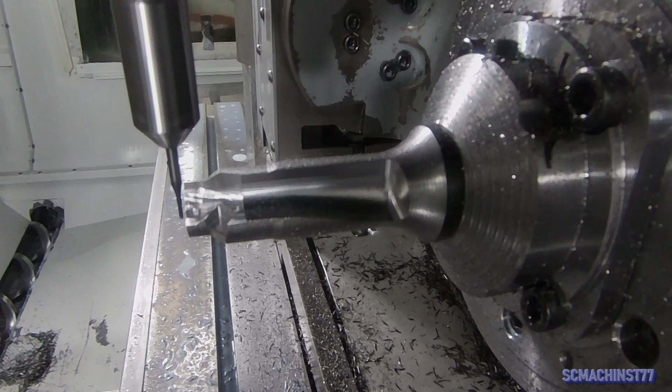What's up everybody, welcome back. We're going to start today, I'm going to show you guys how to do 4-axis toolpaths using your views. This is kind of a follow-up to the video I did before on WCS, tool planes and C-planes.

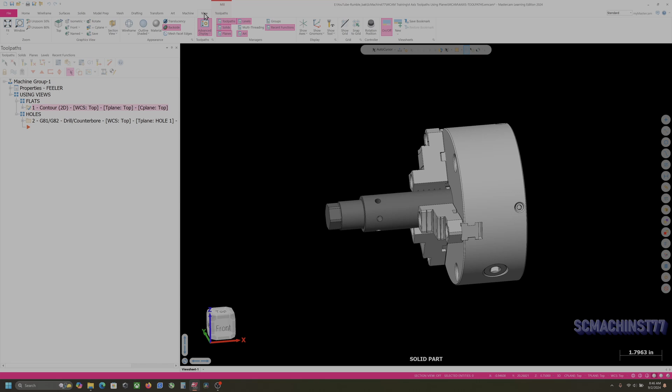What I've got here is this part with a hex on one end and a set of holes, kind of shown here how I'd fixture it in the 4th axis. If we look at our gnomon and our axes, you can see I've got 0 set on the end of the part here. I've also got, in levels, a representation of what the stock would look like.

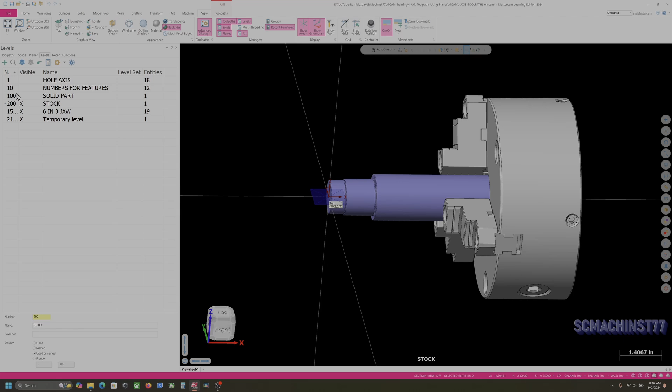Obviously you'd turn this up in the lathe before you'd fixture it in the mill, but we're going to focus on the flats and the holes in this little lesson. So what I've done is I've went ahead and created a view for each one of these flats and each one of these holes. I started a toolpath for each one, just did the first hole and the first contour on the first flat.

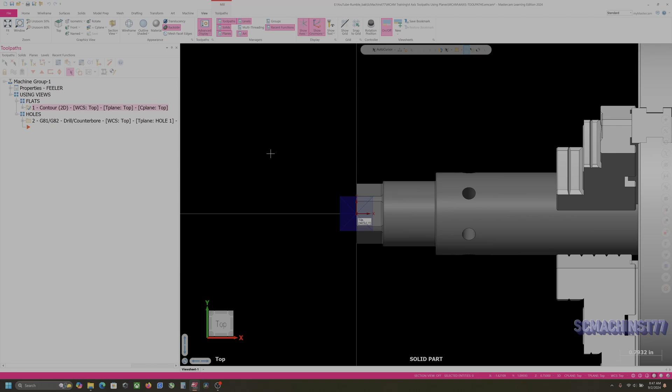Obviously if we look through and go to our planes, this first flat is in the top view. If you look at it, so it's going to be all top.

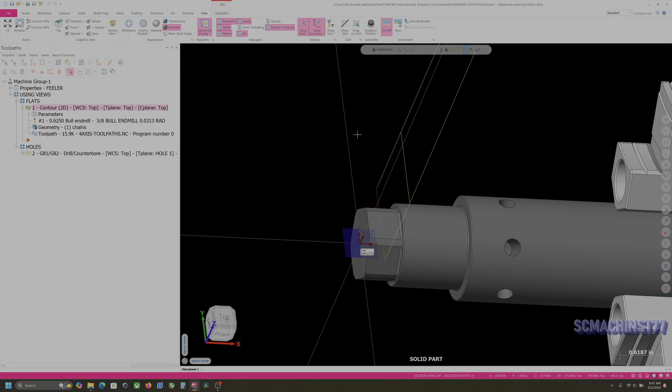Just for a little demonstration, I'm going to do another one. But before you start, like I just did there, before you start chaining, if you look down here where my cursor is, you can see we're still in all top views. Before you start, cancel out of that.

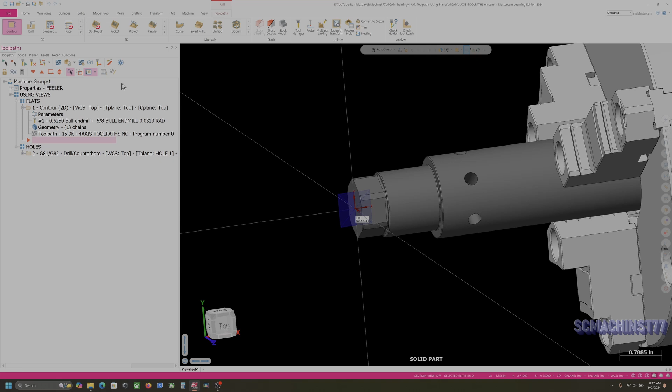What you can do is you can either go to your planes and go to flat 2, or whichever flat you choose to go to next. You can do it that way, or you can right click, go to view named, and then flat 2. That's how I've got mine set up. I think it's how it's generically set up anyway in Mastercam.

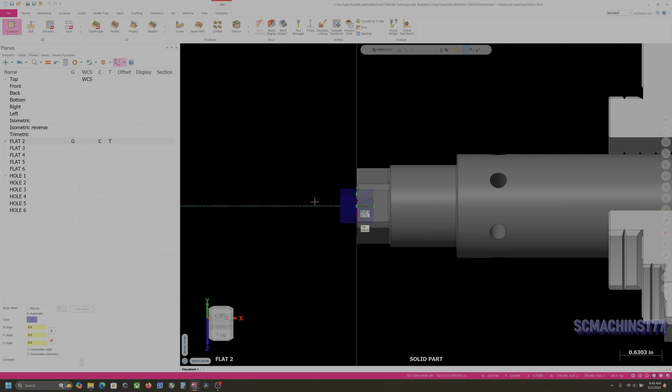So now that we're at flat 2, now you can click contour or whatever type of toolpath you're trying to do, and we want to select this edge. I know it's not all the way up against the wall there, but I'll explain why that is here in a minute. So we've got a 5/8 bull end mill.

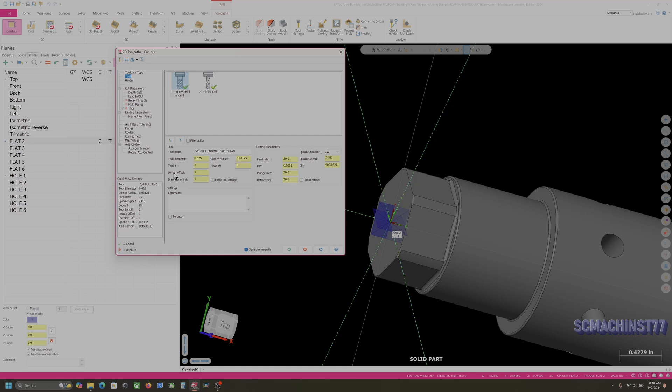16 millimeter is pretty close for everybody who uses metric. We've got a 31 thou corner radius. And my cut parameters, because if we analyze it, look over here, this is a 30 thou radius. I just put minus 30 thou on the wall compensation or the wall stop, and that makes it go all the way up against the wall there.

I'm just doing two depth cuts. None of this other stuff's important. This is not about how to machine it, it's just how to actually create the toolpath.

If we go to our planes, you can see work coordinates is in the top, tool plane flat 2, construction plane flat 2. And all this is, once you've created one type of, like I created that first contour, once you create the next one, everything should stay pretty much the same.

So if you're doing all the same feature, like all these flats are the same distance from center, like a hex would be, you should just be able to get it set up the way you want on the first one, and then as you keep creating new ones, they should all be the same.

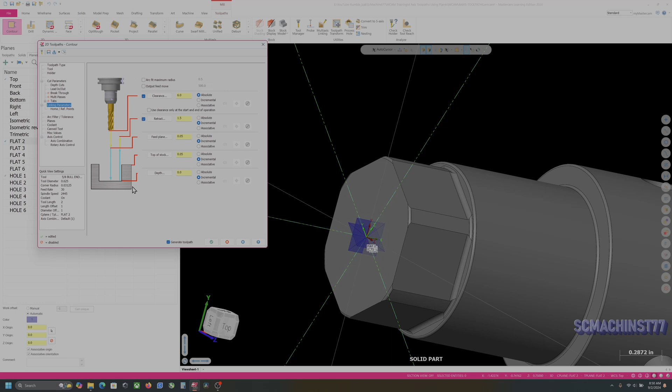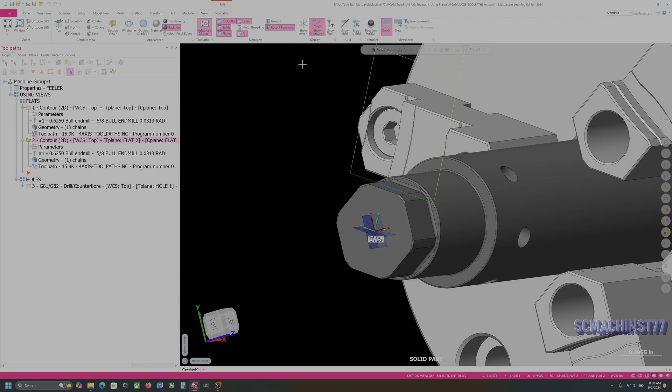So once you've created that, check to make sure your planes are correct, and just hit OK, and then you've got your next toolpath. So there's the first, there's the second. Let me turn all these axes off so it's not all over the screen.

Another way you can do this too is just copy after. Now we've got 6 flats, so we want 6 total toolpaths. Alright, the first one and the second one are good. The third one we'll have to redo.

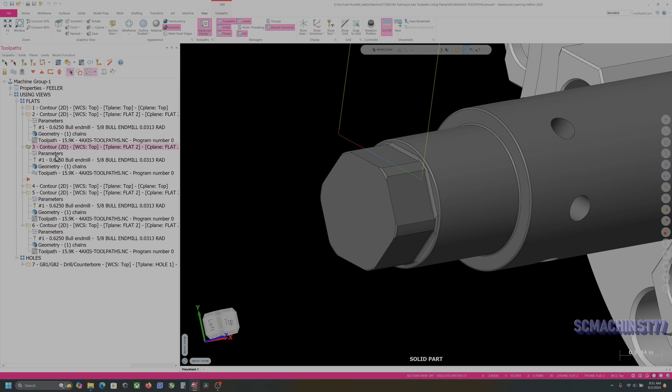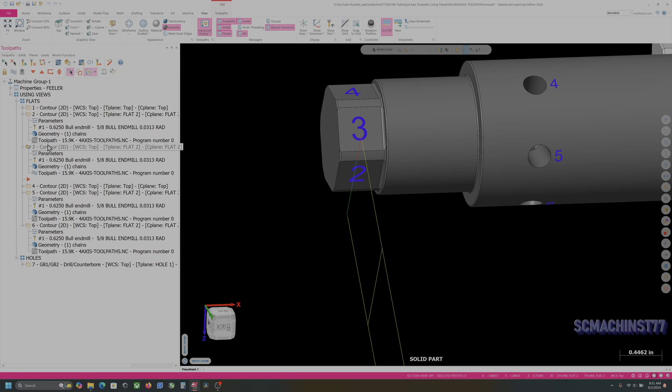The first thing we're going to do is go through and rechain all these. And if you're like me sometimes and you can get lost, what I'll do is go to levels, and I've numbered everything so I can keep up with it as I'm moving around the screen. So we're on flat 3, we know we want this flat. Go to our chains, rechain all, pick that edge, 4, rechain all, and so on.

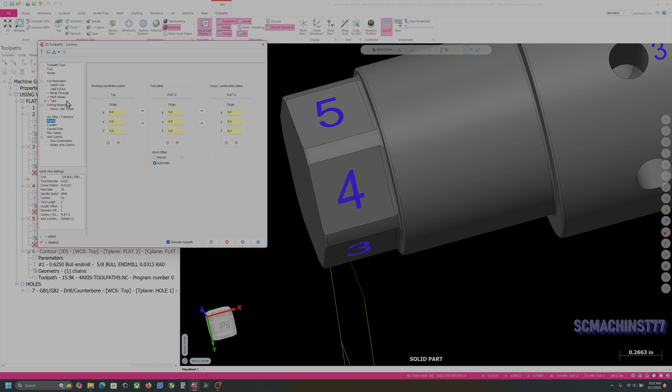Let's see. Oh, I didn't want to open it. Chain, all,

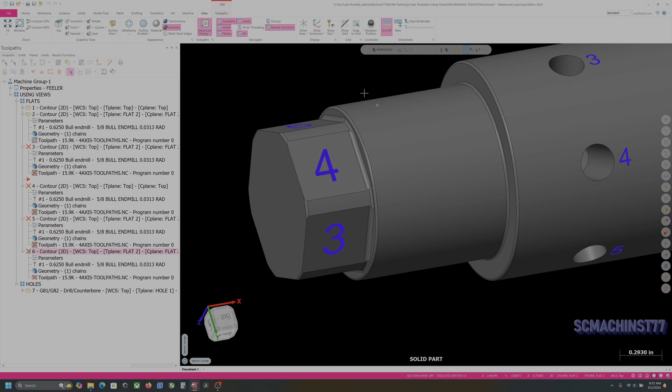Make sure you're rotating kind of like the direction that you want the part to rotate in. So the way I want it to rotate is how I've got it numbered. So depending on what machine you're on, and how you're looking at it down here, it would be rotating clockwise if you look at it from the left view.

Now if I regenerate, that is not going to be right. You got a big mess, and you don't want to try to run that because nothing good's going to happen.

So 1 and 2 are good. 3, we need to change our views. So we're just going to come in here and select flat 3. Make sure the tool plane and construction plane match.

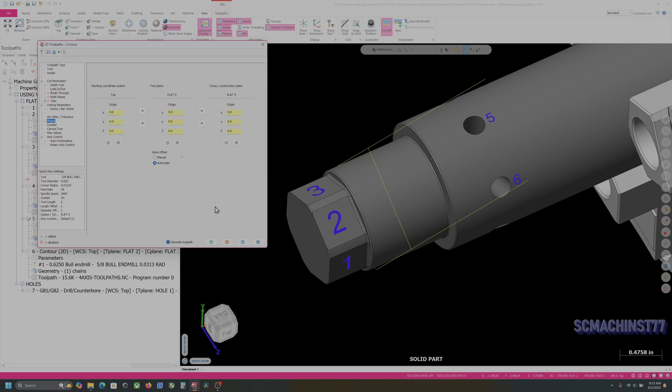Nice, right? Now we're going to go through and do the same for all these. This will be 4. This will be 5. Is that right? Yeah. And then this will be 6.

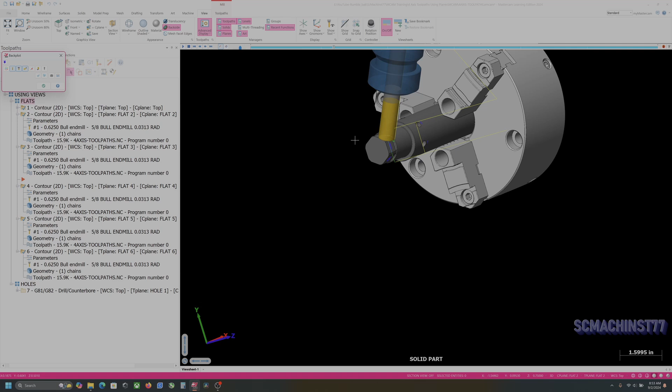Now if we select all of them, looks pretty good. Now we can back plot it and see what it looks like. All right, there you go.

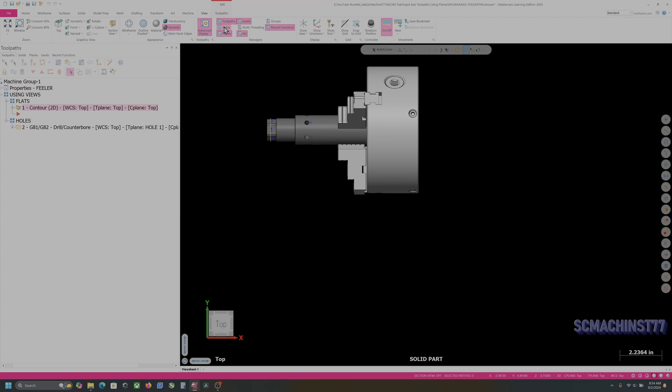Now the way you can do this, just forget about the rest of these that I've done. I'll go ahead and let me get rid of them. Go back to our top view, Toolpath. We're going to go to Transform Toolpath at the top up here in our Utilities.

I'm going to go to Rotate. For our work offset numbering, this is where things can get a little bit mixed up. Pretty sure, and I can't post this out because I can't say for definite, but you have to keep an eye on tool plane and coordinate, that'll make a big difference.

I think we just want to rotate our coordinates, I think. This is normally set up as default to be correct. I'm just going to leave this on automatic right now.

We can force it to be all the same work coordinates. Rotation plane is going to be right. We have 6 flats, but we're going to include, we're going to keep the first one, so we want to rotate 5 times. And I'm going to go 60 and 60. I'm going to hit OK.

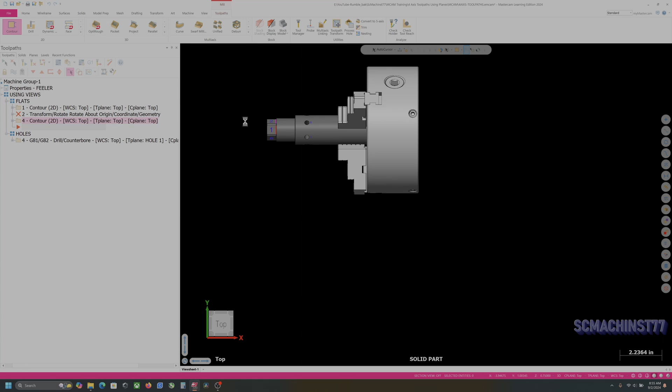And now if we backplot this, yeah, that's what I thought. We're supposed to do Toolplane. All right, that looks more correct.

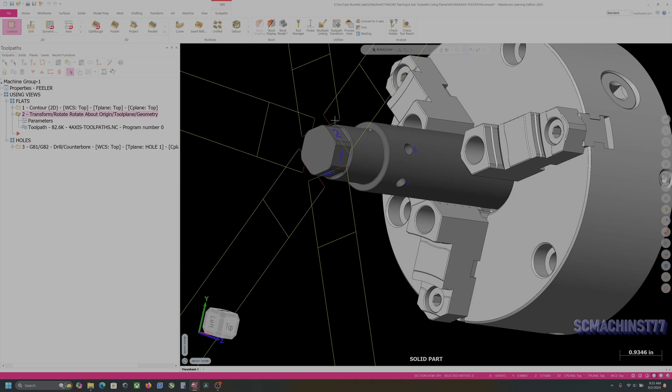And you'll want to verify the code after you've done this too, that it's not doing something funny. I don't know why they've changed this. It used to default at Toolplane.

Coordinates, if you were like in the top view and you wanted to rotate it, you had a part, if you're looking at it this way, and you did one flat from the face, and you just wanted to rotate that contour around the part that way, it would do it correctly that way. Let me do a brief example of that.

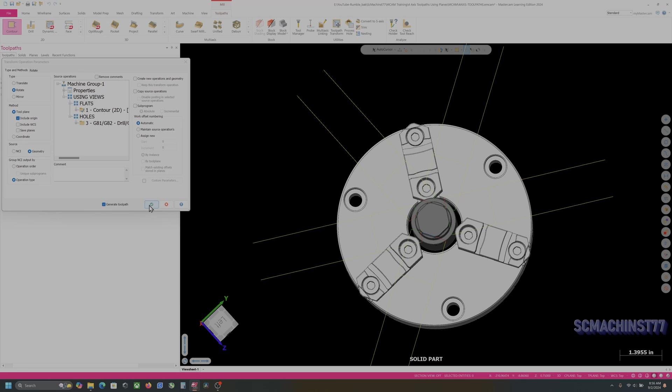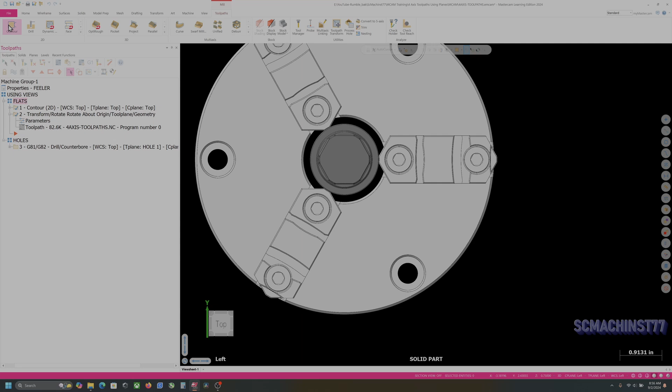So if we do, let's say, let's go to planes and say this is our work construction. Do all that. And we do contour. I'll pick that. Actually going the wrong way. Let's reverse the chain.

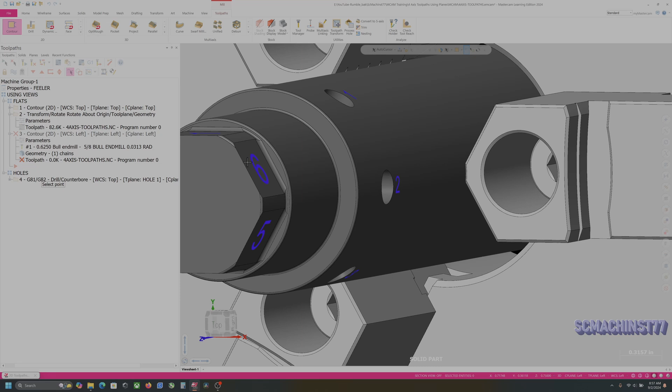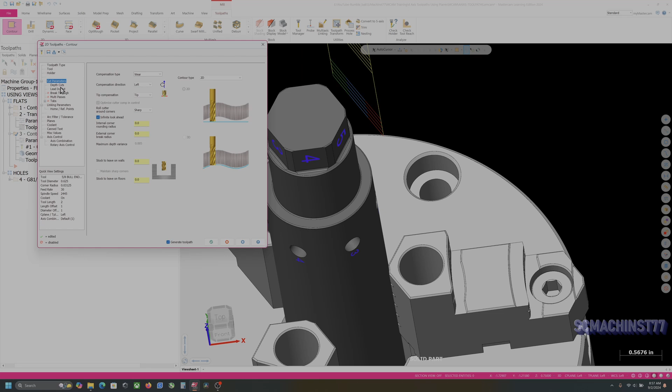Let's see, linking parameters. Put this back at 0. All right, let's see what that looks like. That is not right. There we go. Except I don't want that many depth cuts. Just turn that off for right now.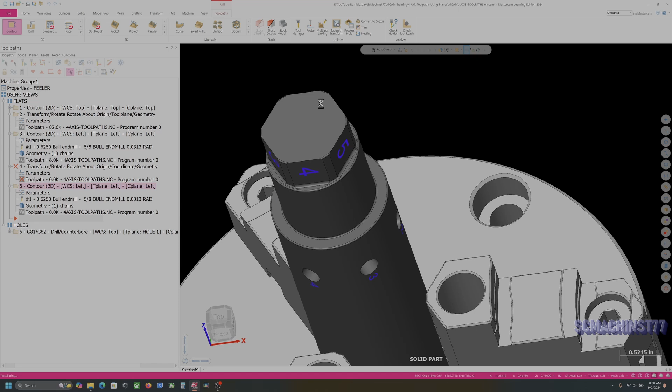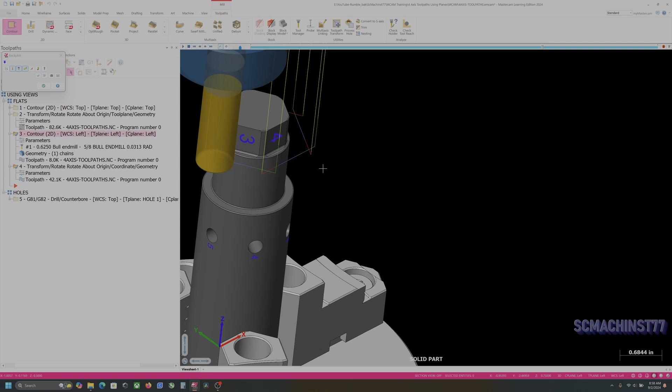Now if we were to do it the other way, that's what I'm talking about. So now it would do coordinates - so when you're in the same view that you want to, is for when you're looking at a part in the view, and you've got a bunch of different features around a circle or something like that - a hole pattern, but it's a special hole or something. All right, that's getting a little bit off topic there.

Might be handy for somebody to learn. All right, so we've done that. That's two different ways to do that one.

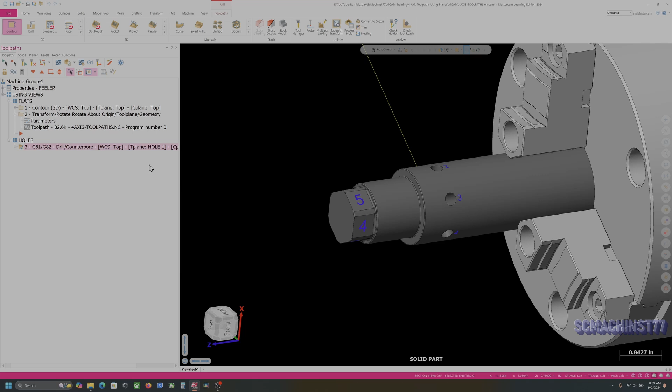Holes - if you get a model and it's already got holes in it like this one, and you want an easy way to create views off of it, you go to Model Prep. I think they changed this when they introduced the Model Prep tab - they moved hole axis to there. Older versions of Mastercam, it's just in the solids tab, but all the newer versions it's in this.

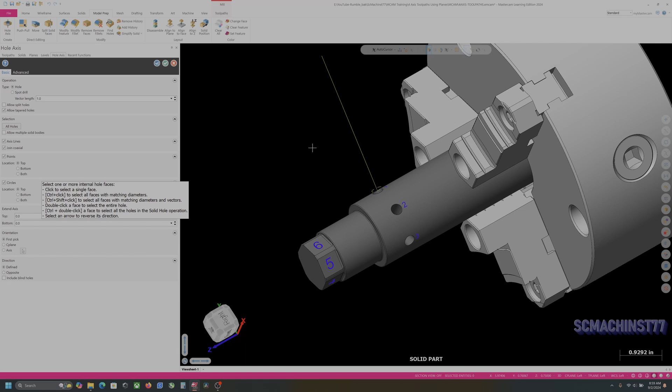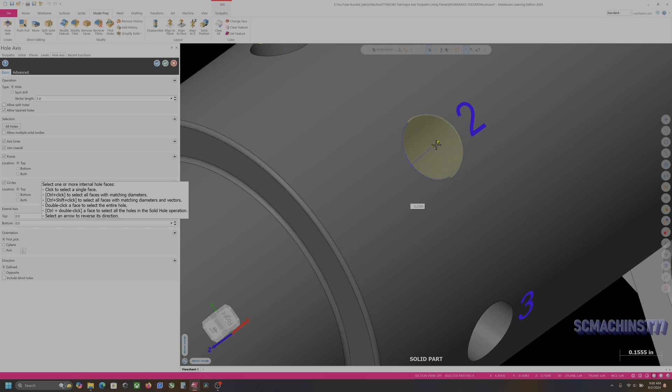If you select that, you can just pick a hole, pick the surface of the hole, and it'll create geometry on it. And that line's basically what you want. Always make sure the arrow's pointed in the direction that you're machining from, so towards the spindle. And then if you hit OK, it'll create geometry for you.

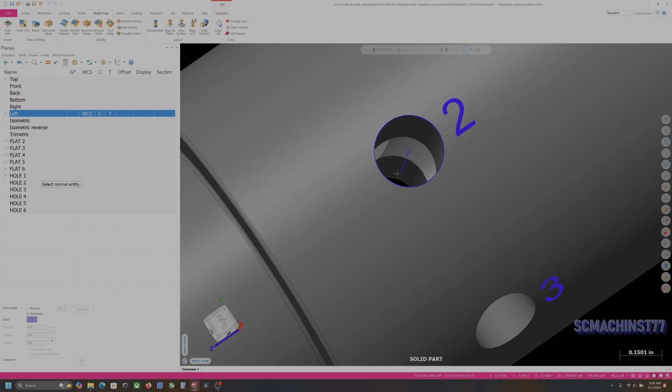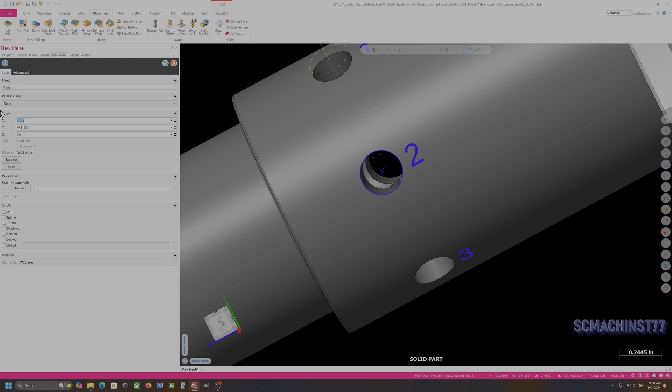And then you want to create a plane or a view from it. You want to use From Entity Normal, and then pick the bottom of the line. For rotary stuff, you want to keep it like this - it doesn't really matter, it's always going to go off your WCS as far as that goes. And then you want to always change these to zeros just so everything matches your top WCS. I don't think you have to do that, but I do it just to keep everything the same.

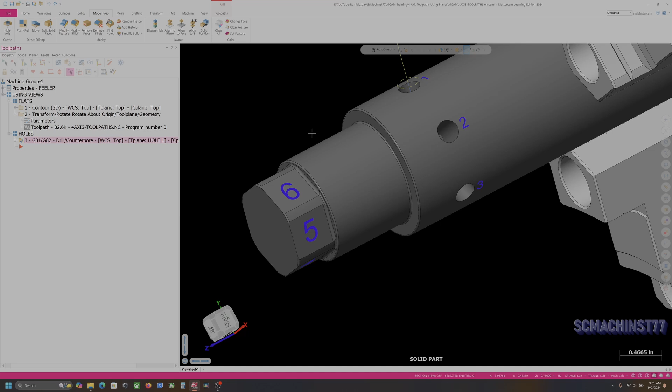All right, we're not going to create that - I've already created it, and we're going to undo that geometry. Holes are basically the same way - I've already done this one. That one's actually 60 degrees off. So you can copy and paste and do that one like I did, or let's open all my hole geometry up.

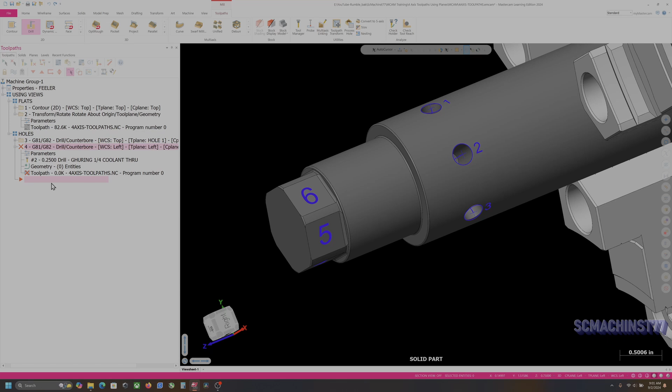So if we do Toolpath Drill, we pick - I'm going to hit P so it'll force it to select a point. I think all this stuff is set up from the last one. Let's see, planes - oh not the left, let's see, I was still in my left construction tree. So when you're doing multi-axis toolpaths or multi-view toolpaths, you always want to make sure you're in the correct planes before you select. You want to change that back to top.

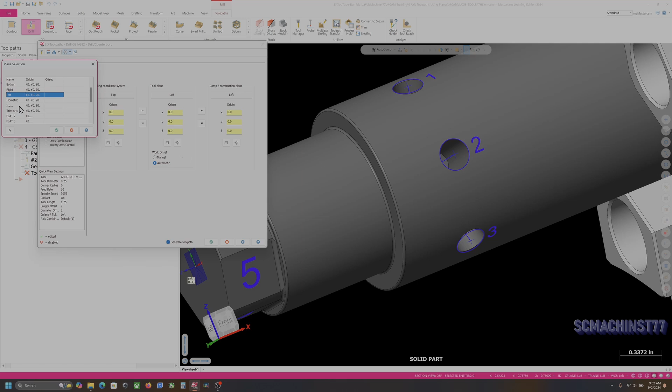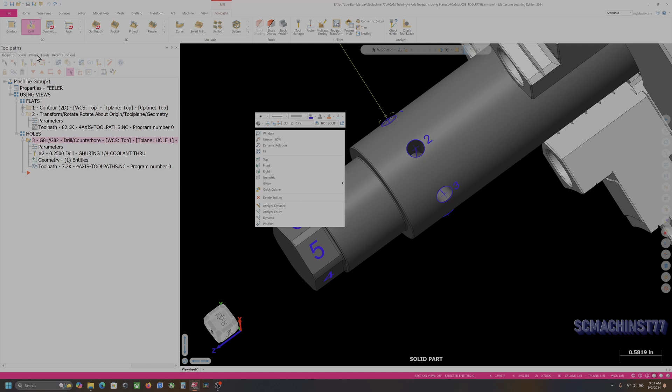This is hole 2, make sure those match. And there you go. Or we can delete that - escape. Come on now. Now we can go. Let's make sure I get back on my top work construction. Go back to transform, make sure this is all correct.

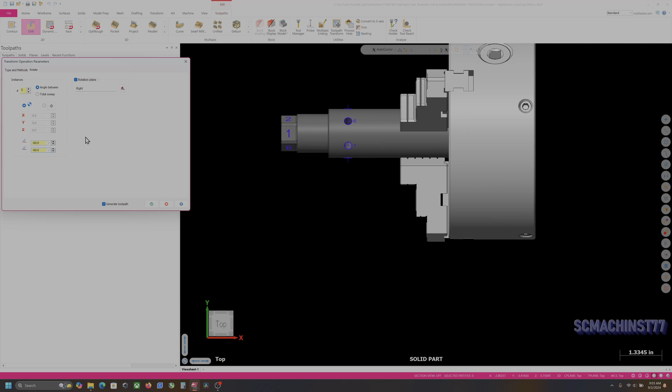Now we want to go minus, because we're going to go the opposite direction - minus 60. Depending on your equipment, if you wind up your rotaries, it might run into travel or something like that. So I try to keep things going one way and the other, plus I feel like it helps save a little bit of time.

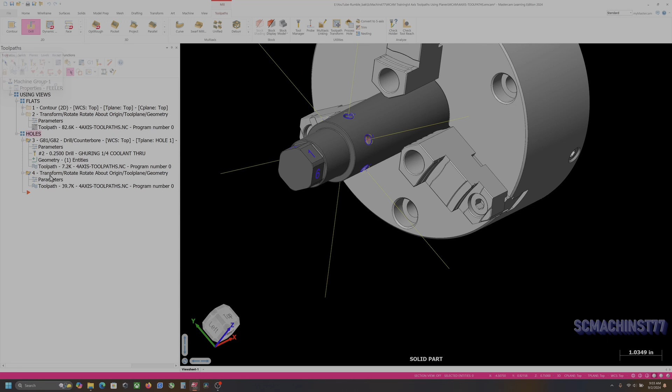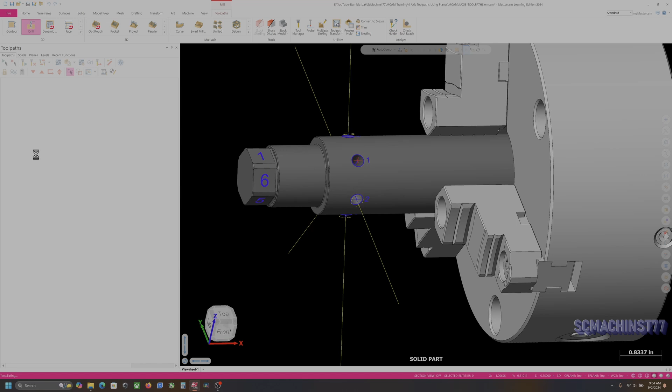So now we've got all our - why did you go that way? Were these going the wrong way? They were, so I've got to change this one back to minus. So I was wrong - that's why I always back plot, so I can see what's going on. All right, that's the correct way.

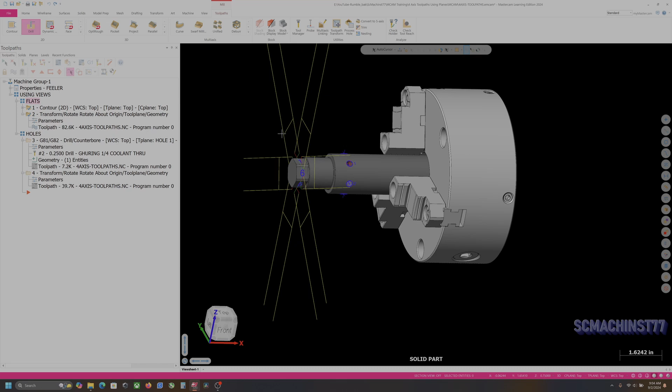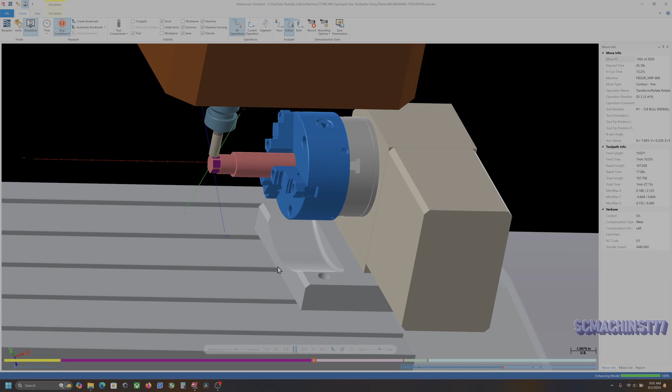And we should be able to verify this. Actually simulate it. I don't want to stop. All right, that looks just like what we want.

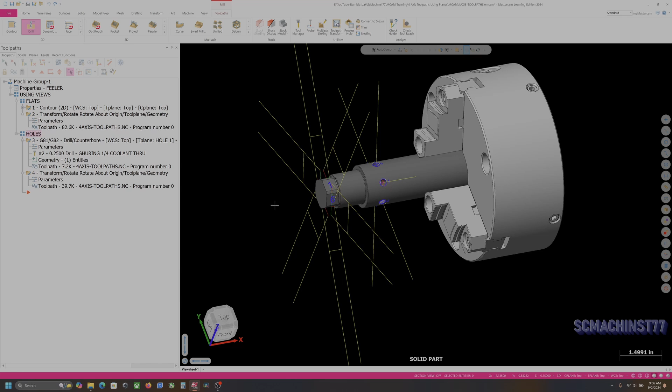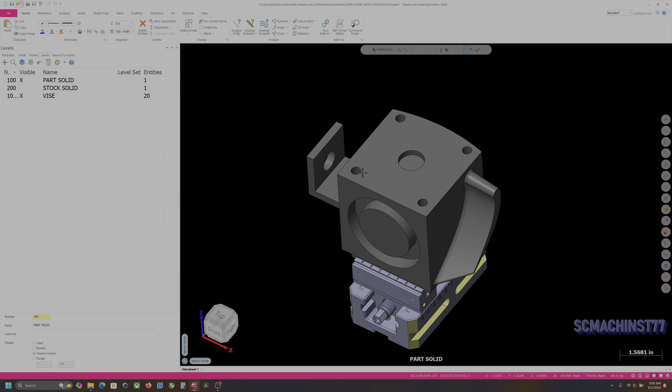All right, I hope this gives you a little basic understanding of how to create a rotary toolpath. In the next video, we're going to move on to this thingamajig that I created here, and we'll do some toolpath roughing using the same things that I showed in this video, using your views. Like I was saying, you want to rough using 3+2 style toolpaths, and then we'll start going over a few basic 5-axis toolpaths. So until then, I'll see you in the next video. Thanks for watching.